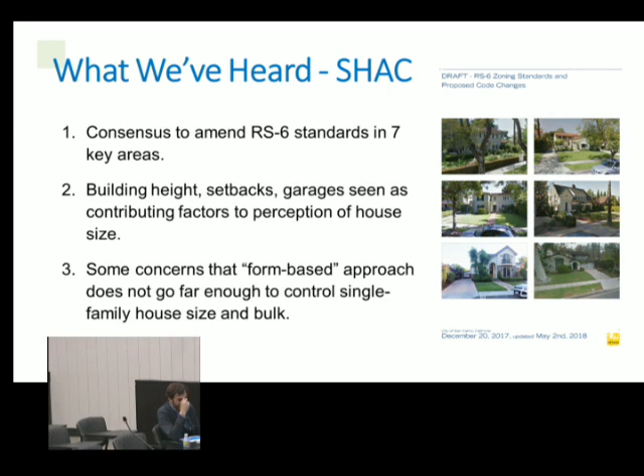For the next slide, I'm going to back up a little bit and start with what we heard from the Single Family House Advisory Committee. When we started out, the charge from the City Council was to look at the size, scale, and massing of single-family homes, in reaction to some community members talking about how houses had gotten larger and the scale and massing of our homes in the community.

The City Council put together the Single Family House Advisory Committee, and they looked at the standards we currently have. When they looked at our current standards and what was being built, they noted key areas that they believed, if adjusted, would reduce the mass and scale of homes in the community. These were things such as building height, setbacks, and where you put the garage.

A lot of times the concern we were receiving is from homes that had a 2-car garage at the front of the house. On smaller lots, 40 and 50 foot wide lots, what we were seeing is that the garage dominated the ground floor, and the front door became an afterthought.

Some of the concerns they had, and others have had, is that maybe the form-based approach they were looking at doesn't go far enough in terms of dialing down the size and bulk of single-family homes. But they did talk about FAR a great deal.

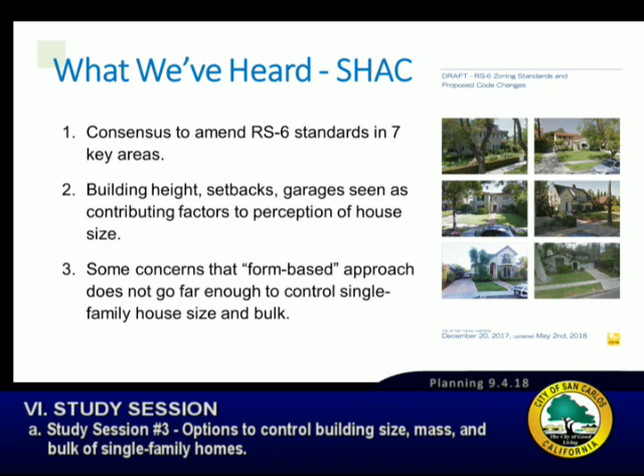The SHAC believed that the most effective way, by consensus, to reduce bulk and mass of the homes was to work on the physical characteristics of the house itself, to take the scale, the walls, and the roof and push it all in, as opposed to using a number to do that.

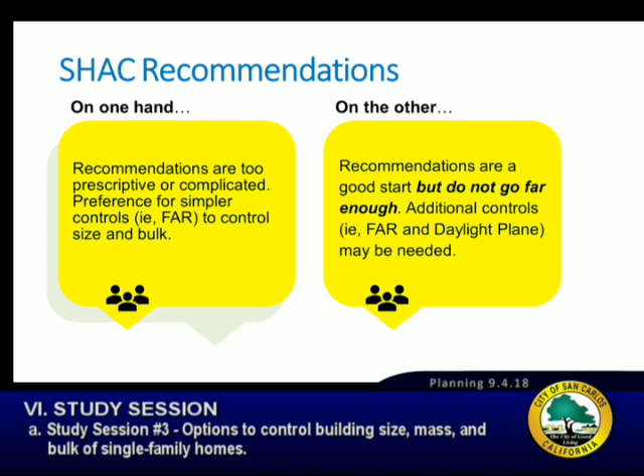So on one hand, what we've heard is some of these recommendations are too prescriptive, too complicated, and there's some preference for more simple controls like floor area ratio. On the other hand, some people think the SHAC came up with some pretty good ideas. However, they may not go far enough, and additional controls - we've heard of floor area ratio, and also people mentioning daylight plane - those things might be needed as well.

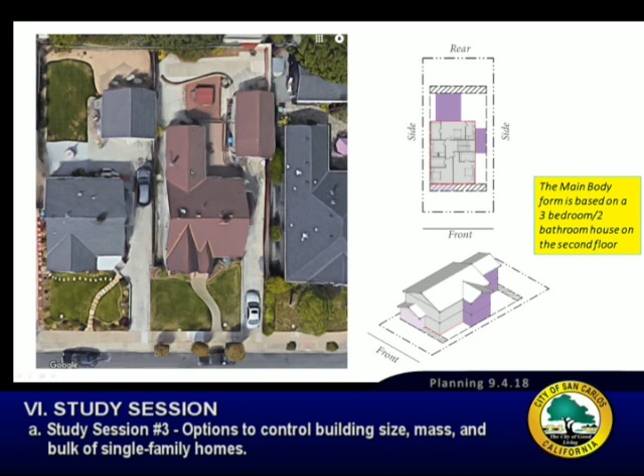What we've heard from the public is a desire for floor area ratio limits, and we'll talk about what that means, as well as a desire for something called the daylight plane. Since we began the process, other ideas and concerns have been discussed, like privacy, light, air, and views. Some believe the idea of a daylight plane might help with that.

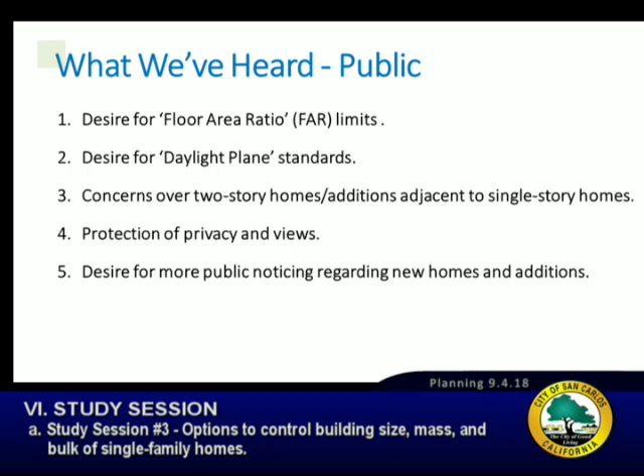There are concerns over two-story homes in well-established neighborhoods with single-story homes, and how that looks. There's also concern about protection of privacy and views, and a need for more public noticing for the Residential Design Review Committee meetings.

When we looked at these other communities, we looked at their codes and talked to the city planners to verify this information. There may be other ways to interpret these numbers, but we didn't want to be too drastic in our recommendations for FAR, and we did include our own city, San Carlos, in these calculations and comparisons.

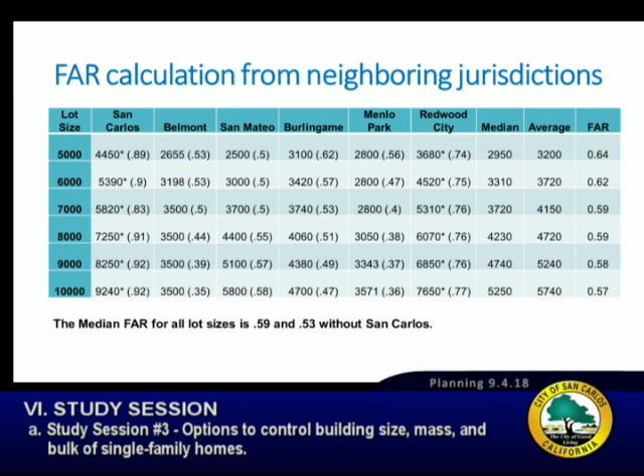Other interpretations of these numbers may include a lower FAR, but a different interpretation would not change staff's recommendation to you this evening for your sliding scale option, or option number 3, which is an FAR option. That wouldn't change. And if the Planning Commission wants a more restrictive or a less restrictive FAR, that's certainly up for your consideration.

One of the other things that came up at the Planning Commission is a concern about topography and how these standards would affect houses or properties with a steep slope in the hillside areas of our community. We've always recognized that these properties are inherently different—much more difficult to build on. They're very steep, and it costs a lot of money to dig out the hillside and put up big retaining walls.

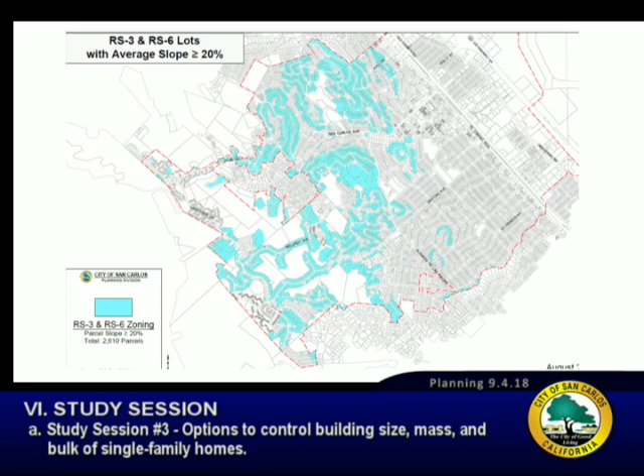We're not suggesting that the SHAC recommendations should be applied to these hillside areas—it's a different area. However, in order to reduce the bulk and mass on hillside homes, there are a couple of recommendations we would suggest adding to the hillside overlay district, which we'll talk about.

Then we looked at how many lots in our community are of a smaller size, and considered the idea of neighborhood zoning—where certain parts of our community with homogeneous characteristics might get specific standards for neighborhoods.

So if we were to divide our community into neighborhoods, it would be very complicated to do and difficult to implement and work with on a daily basis. Thus, our recommendation is to move forward with a property-based approach—based on individual lot widths—rather than a neighborhood approach.

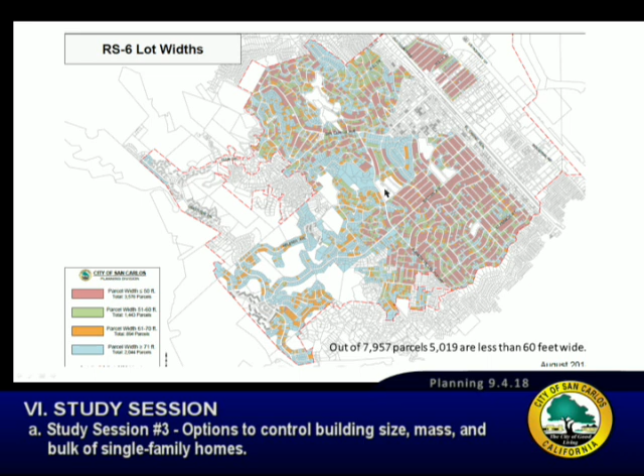Another concern was what happens up in the hills. Above Alameda de las Pulgas is where you start to get parcels in excess of 61 feet in width. So the larger parcels tend to be in areas with greater slopes—the hillside overlay zone. This gives us a good separation when dividing the community based on physical characteristics.

So in response to what we've heard from the commission and the community, we're presenting three different options. Option 1 would be the SHAC recommendation, including the architect's request, with one additional twist: an additional 9-foot second floor setback.

As you may recall with the SHAC approach, the main building mass could be two stories, and that two-story mass could move up to the side property line. It would have to be a condensed two stories, but still only 5 feet from the property line for a certain distance.

People thought, hey wait a minute, that's a little too much. So what we're suggesting is that the second floor be moved in 9 feet instead of 5 feet. That's different than what you've seen before—it's a more significant setback for the upper floor.

Option number 2 would be an FAR sliding scale. We'll go into detail, but basically the more square footage you want, the more rigorous a process you'd need to go through. Number 3 is a more simple, straightforward approach where you'd just have a floor area ratio and a lot coverage maximum, and work with what we've got today.

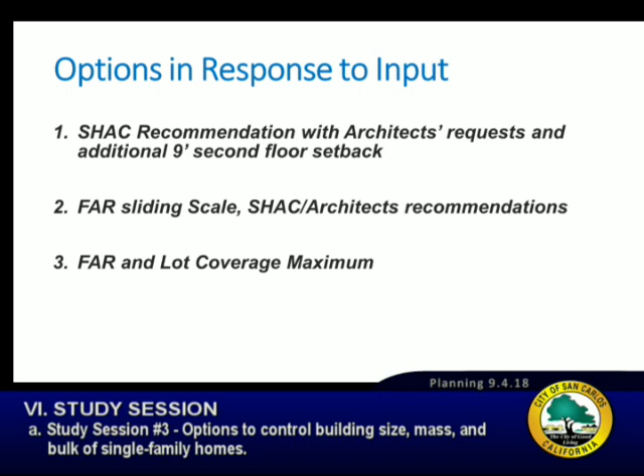In terms of option one, the SHAC recommendations, on the left-hand side you'll see the building setbacks—those are the controls they use. And the controls they suggested do have what we call resultant reductions. So based on today's standards, if you apply their standards, you would have a reduction in floor area ratio of about 20%, a 22% reduction in lot coverage, and an 18% reduction in overall square footage. So it does result in numerical changes to our homes.

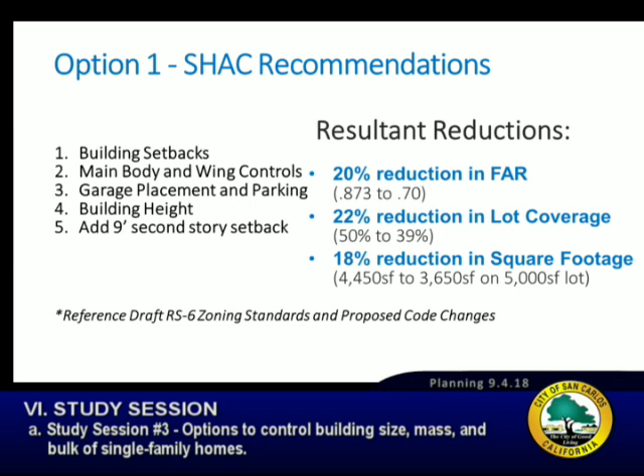In terms of sliding scale recommendations, I want to talk about some of the research that informed this suggestion. Looking back 10 years at almost 100 applications for homes, the majority are less than a 0.5 FAR and lot coverage less than 40%. However, I think what we've seen in the last 3-4 years is an uptick in the square footage of homes being built.

San Carlos currently has a maximum FAR of up to 0.92, and generally peninsula cities allow for a median closer to 0.59. We have a lot of lots, maybe 63%, that are less than 60 feet wide. In comparison to other communities—this was noted at SHAC and discussed in great detail—San Carlos is a little different in character than Burlingame, San Mateo, Menlo Park, which have more larger lots to contend with. As a point of reference, the current threshold for Residential Design Review Committee review of a new home is an FAR of 0.4.

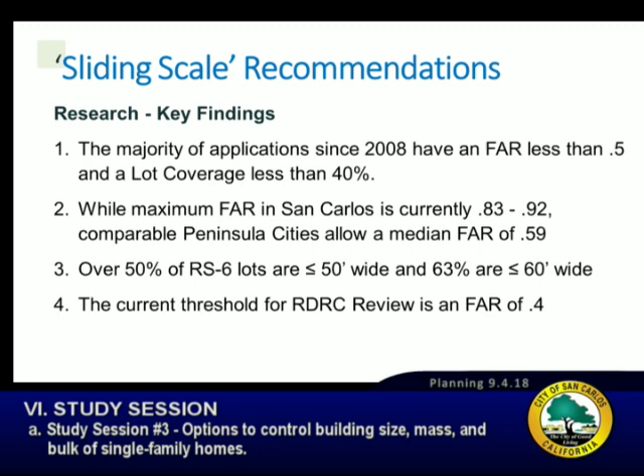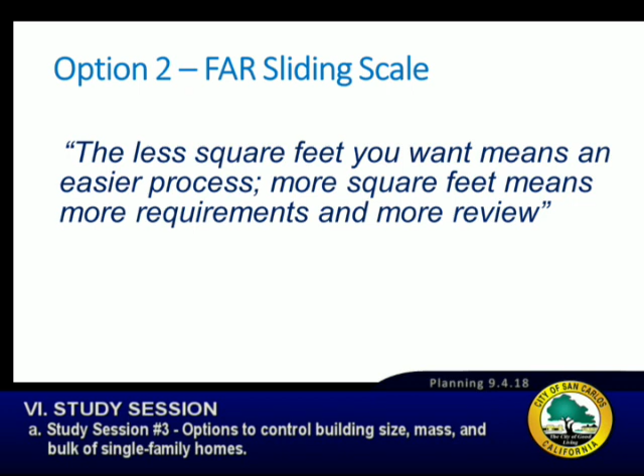Option two is the sliding scale, and the primary principle is that the less square footage you want, the easier process you go through. More square footage means more requirements as you ratchet it up, and more review. So let's look at that.

These are the three different sliding scale options, really based upon the house size you want. We started at a 0.50 FAR, and the reason we went to a 40% lot coverage is because of our historical average. If the commission thinks that should be larger or smaller, any of these numbers could be changed. But at 0.50, that would be processed by city staff using our current zoning standards. If you want more, 0.51 to 0.59, you'd have to go through residential design review, using the current standards. However, we would add some additional thresholds.

We would increase the rear yard setback and push that rear yard forward 20 feet on the first floor—currently it's 15—and 25 feet on the second floor. That really starts to open up the backyard. We'd also reduce the maximum garage width within 15 feet of the front facade to 40% of the facade on lots over 60 feet in width. Earlier I mentioned that garages became dominant and added to that feel of mass on the front of the house—so that's what this addresses.

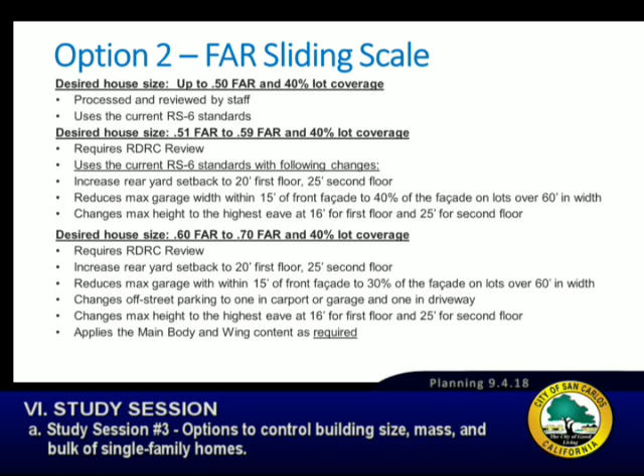And then changes to maximum height for the eave and second floor, to push down the upper floor and make it look lower. A desired house size of 0.6 to 0.7 requires RDRC review and some of these other standards we saw above, plus changes to off-street parking—1 space in the carport or garage and 1 in the driveway. You also have to apply the main body and wing content suggested by SHAC as a requirement, as opposed to a guideline.

Option 3 is very straightforward: let's retain what we have, but add a 0.5 maximum FAR for all lots, and establish a 40% maximum for lot coverage. We also talked about daylight plane, and a lot of people are interested in this concept of daylight plane.

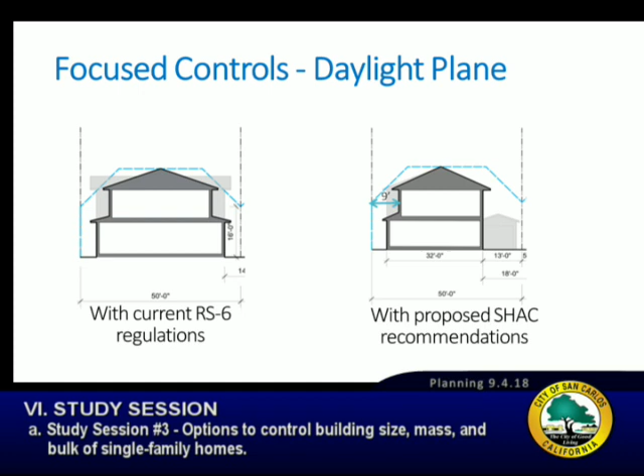What we see on the left-hand side of the screen is a daylight plane in our community without regulating it. The way we created our daylight plane is we set in that second floor 9 feet on both sides, and for the average daylight plane you see in most communities, it would fit within that. With the proposed SHAC recommendations and that additional 9 feet, this box area was the former SHAC recommendation, this gray area, and now we're suggesting if you did go that way, you would set that in and conform again to that daylight plane idea. We can talk more about these. This isn't recommended by staff, but it's something people have discussed.

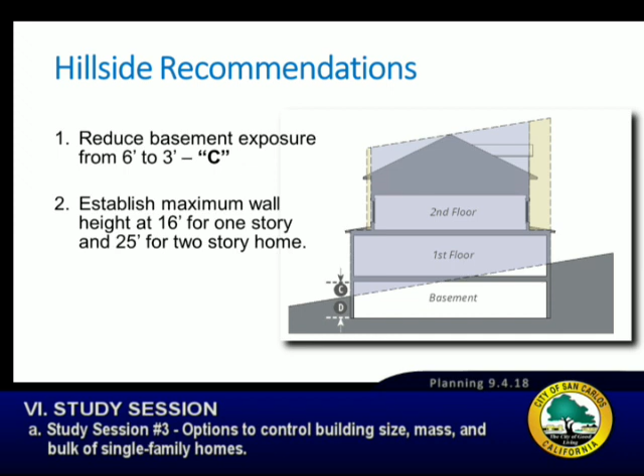In the hillside recommendations, we're suggesting a couple of changes. One thing we were seeing on the hillsides with these slopes is that people were putting in basements, and the part of the basement that you saw got real tall, generally about 6 feet. What we're suggesting is to dig it into the hillside a little more, lower it, so you'd see less of the home and it would look less like a 3-story house. We'd also establish a maximum wall height at 16 feet for 1 story and 25 feet for a 2-story home, which we didn't have before. Again, that compacts the roof form down a little to make the house look smaller.

So tonight we're asking for some direction. We'd like you to direct us to proceed with one of the options, or you could mix and match if you like. Once we get that direction, we would formulate a draft ordinance for your review at a public hearing. We're also looking for confirmation of some of the recommended changes to the hillside overlay recommendations. That concludes my presentation, and we're available to answer any questions.

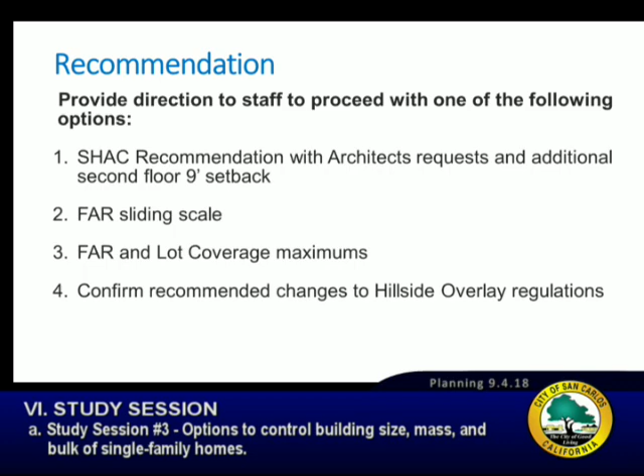Thank you. I have one comment, or would ask you to go into more detail on the daylight plane. We had one gentleman in here a couple of times who talked about his loss of sunlight, and my understanding from talking with the city is that it's because of how our zoning allows for less setback at the rear of the house. I would like that explained a little better, because I think that might play into the recommendations.

Well, what we're going to do is have Stefan look at that and talk about daylight plane. I guess the question is, are there going to be other questions we could gather up from the commission and have Stefan walk through some of the other technical issues like daylight plane? We can do it either way, but if there are going to be several, maybe we could have Stefan get up there and go through some of these. Well, as a complement to Shannon's comment, I'd like to understand the benefits of not having a daylight plane, or the impact of not having one, in terms of the design elements that would then be allowed.

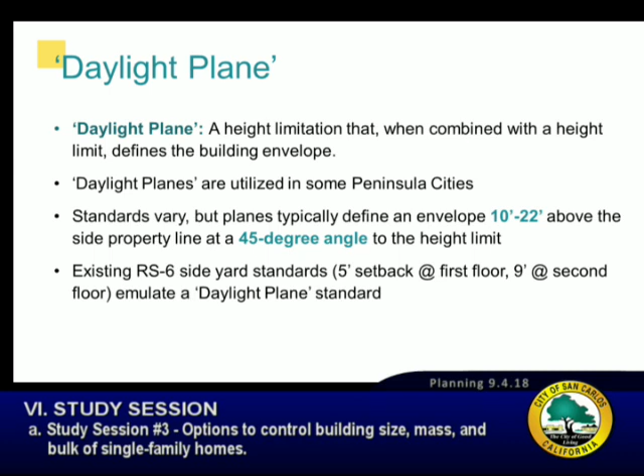As Al mentioned, what we have in San Carlos today in the existing standards is there's not a clear mention of a daylight plane, but the fact that the second floor has a 9-foot setback as opposed to a 5-foot setback imposed at the first floor, generally is causing the house to sort of fit into that trapezoid.

So when we analyzed what daylight plane standards were doing in other communities, we took a smattering based on some of the peer cities. Generally it's 45 degrees, generally between 10 and 22 feet measured at the side property line, and there are other factors which make it difficult to compare apples to apples. For example, Palo Alto imposes a very low daylight plane at the side property line, but they also allow additional height in the middle, greater than what other communities may do.

One of the things we've been concerned about is that the term daylight plane is a bit of a misnomer, in that the availability of sunlight in this three-dimensional slot that the daylight plane creates is very dependent on the orientation of your house. If your house and your neighbor's house were purely built on a north-south axis, the amount of sun that would enter into the daylight plane would be much greater than if your house was built on an east-west axis.

So the forms that the zoning promotes do not in and of themselves set a minimum amount of sun or light to reach the ground plane between you and your neighbor's house. So we want to be mindful of that.

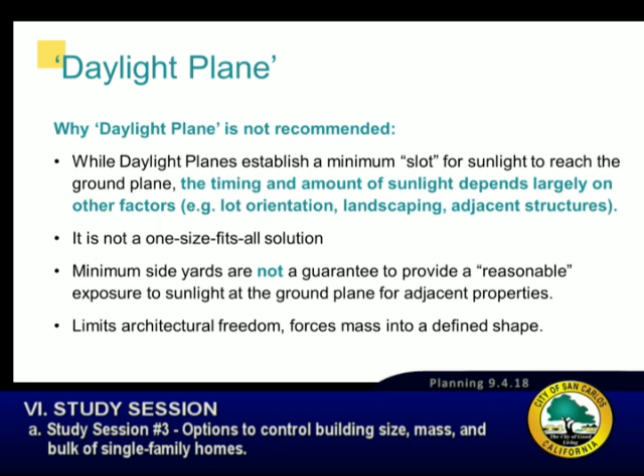You can do a two-story mass that is all the way to the 5-foot setback. The way the SHAC discussions went is that allotment would come out of how you actually dealt with the massing that would go into a wing. So if you had to set your main body back from the side, the two-story mass in the wing, which we had generally started to max out around 18 feet, would be allowed to go within that. That's the result you see in the massing of the houses and where they start to compete with the daylight plane.

So as today, what we typically get is a slot that is 10 feet wide between buildings on the first floor and 18 feet wide between buildings on the second floor. What this would actually generate is a larger setback, at least on one side of the property. But if you chose to put your house in the middle, the relationship of the two-story mass to your neighbor would more or less be the same as what you have today. But you can see that we are generally increasing the side yard setback compared to what the existing RS6 standards impose.

If the area which we are currently allowing to be a 5-foot setback in the rear, versus the 9-foot setback—if we were to make that a 9-foot setback as well and not allow the 5-foot setback in the rear for the extra 20 feet of the house, would that resolve any portion of the problems or complaints we are hearing, or would it not?

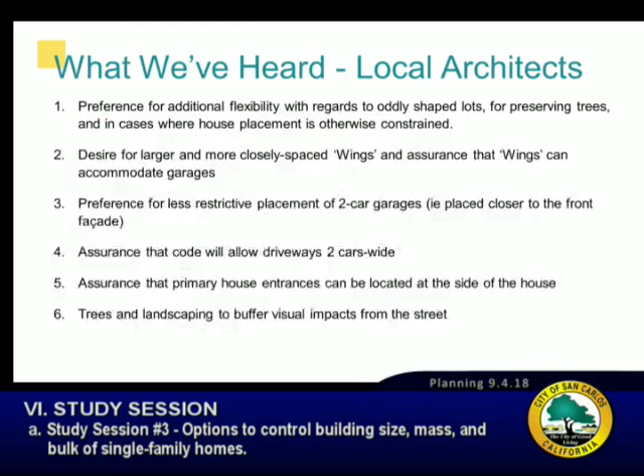Yeah, we do. Let's see if I can flip back to this, because that parlays back to your initial comment, Vice Chair Bergman, about the impact on rear yards. So I'm going to start with this one.

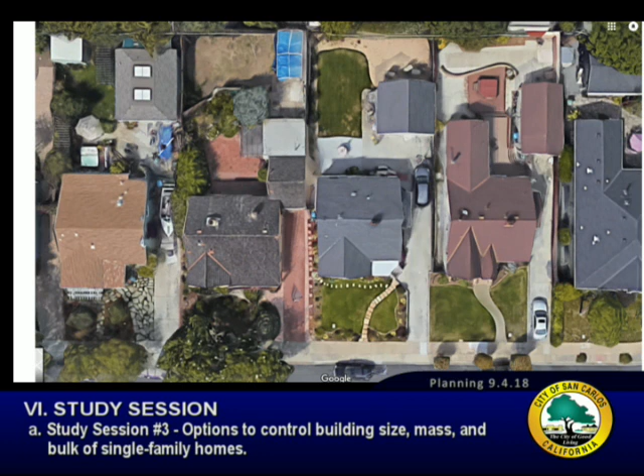Going back to this diagram that Al showed: not everywhere, but on many blocks, the size of rear yards is generally consistent, and it's generally much greater than that 15-foot minimum setback. It's fairly common for rear yards in San Carlos to be 25 to 30 feet in depth, but everybody is sitting on an untapped piece of their zoning envelope. That means if your neighbor chooses to build to the full extent of their rear setback within the limits of the control—today the 50% lot coverage—there is room for conflict, because suddenly where your rear yard was shared by adjacent rear yards and adjacent properties, you'll have a rear yard addition that is suddenly looking onto someone's backyard.

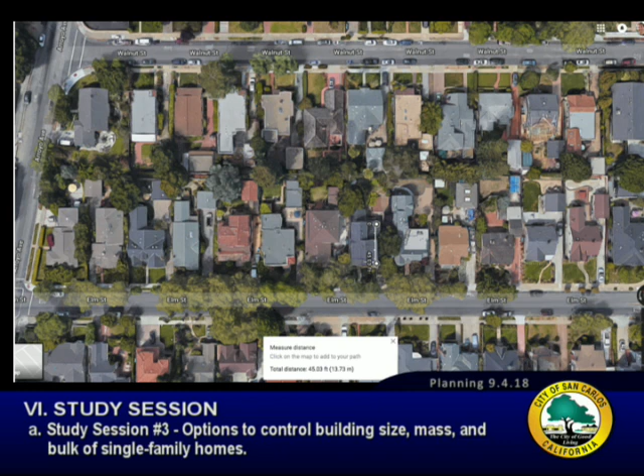So the idea behind increasing the minimum setback by at least 5 at the ground floor and by 10 on the second floor, and limiting the amount of addition space that can go into the area between the main body and the rear yard to the dimension of a rear wing, is to start to limit some of those potential conflicts that we see. So, I'm sorry, go ahead.

I was just going to say, but that's except with regard to the new garage standard, which can be right on a 5-foot setback. Trying to reconcile the thought that this is a much more liberal, airier setback for your neighbor, but then encouraging people to put a garage at a 5-foot setback seems very counter to that thought.

That is correct, and I appreciate that comment. One thing to keep in mind is that the provision to put the garage at the rear setback is not a new standard—it's actually built into the existing RS6 zoning. I don't know why that was done, but I suspect the insertion of a garage in that rear yard zone has a different impact on privacy than the insertion of an actual house.

There's another angle to that when we start to think about that garage as a place where you could put an accessory dwelling unit or something similar. And so those things actually do start to raise.

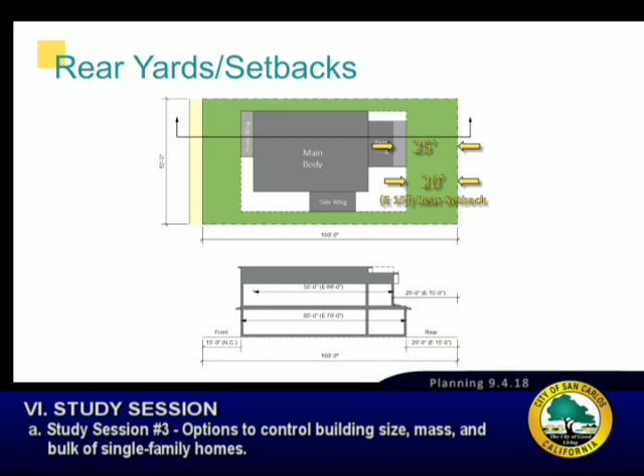One of the intentions of the SHAC recommendations was that it seemed to make sense to carry that provision forward, allowing the garage to go all the way back to essentially the rear of the property, particularly because it doesn't present the same privacy issues that building a house to the rear would suggest. Historically, in the massing of the house, one of the main problems we have is these big garages at the front. So one of the things SHAC looked at is, what if we took that out? What if we removed that box out?

What happens? Well, the house gets smaller. It's like a balloon, right? You take air out of the balloon. And we're already doing that—we're already putting our garages at the rear throughout the community, and people have been doing it for decades and living that way. So let's codify that, let's make some standards around that, maybe more robust standards. So that's the intent: to take that not-livable area and put it somewhere else, so the main body of the house looks smaller.

And Al, are we treating garages any differently, or do they count as lot coverage and floor area ratio space? They count as floor area ratio space. Now, I can't recall if they count as lot coverage too. They do? Yes, they do. Even when detached and on the rear line? Okay, yeah, okay.

So this slide is part of a larger discussion. We didn't have a chance to share these with you last time, but thinking about the rear yard setback, this is a strategy. Today you have 15 feet. There's a provision for detached garages today that can actually shift them back all the way to the rear property line. What we're proposing is 20 and 25 feet at the first and second floor respectively.

The analysis we show here is that today you can build a building up to 85 feet from the front property line back into the lot, and these standards would shift that from 85 to 65 feet. So the maximum depth of a building would be reduced, and that back portion would be limited to a rear wing, as opposed to the full extent of the zoning envelope moving to the back setback.

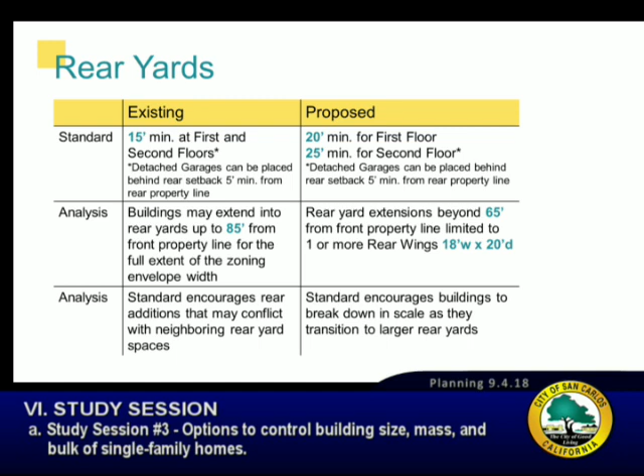But is there another way to get at the same issue? I personally have a hard time with taking away people's backyards. Can you get the same effect by making the setback 9 feet, period, on the sides of the house, instead of 9 feet except for the last 20 feet where it becomes 5 feet? Will you get the same result? Yeah. And plus the reduction of the lot coverage from 50 to 40%—would that solve the problem as well?

Yeah, I mean, there is a consideration. I think what I'm hearing you ask is, could the side yard setback be consistently applied at 9 feet? Would that make a difference on the daylight plane? Yes, it would. And I think our measurement is that, understanding the majority of lots are 60 feet or less in width, and over 50% of lots are actually 50 feet or less in width, that's a pretty significant reduction in buildable area if that setback is imposed on both sides.

So what we're suggesting is that you'd still be allowed to build up to a 5-foot side yard setback. The SHAC recommendation said you could, in theory, shift that all the way over to one side of the setback on the property. And then what Al has described tonight is that if there's a concern about the height and mass of that two-story form at the side setback, an additional 9-foot setback at the second floor could be imposed.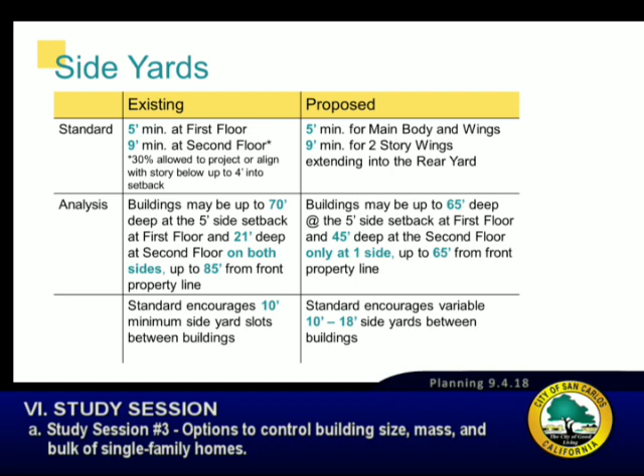And if I can flip back to this, I can show that graphically what we're talking about. Stefan, I was thinking maybe we should show some of the models. I think those are in your presentation. I can do that, because what you're saying might be easier to see.

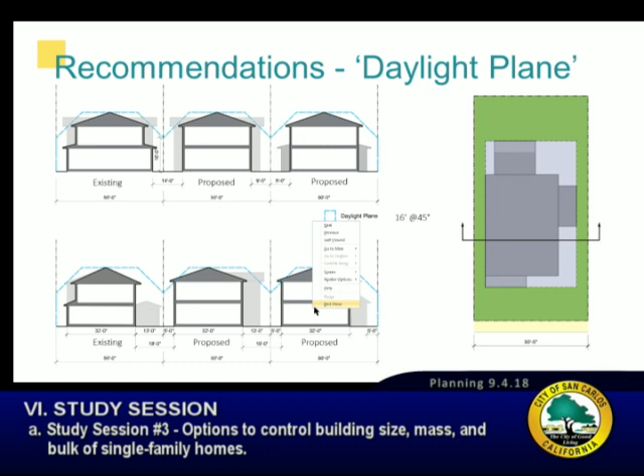Let me stop for a moment, because the way I'm looking at this is just my own personal feeling. I'm personally leaning towards having a FAR and a lot coverage standard. What I'm trying to get at by asking these questions is whether we can reduce the likelihood of affecting people's light plane, or whatever we'll call it now, by imposing new standards for FAR, lot coverage, and possibly setback. I don't know if that's the right answer, and I'd like the architects to weigh in on that, but that's where I'm going. I want to let you continue.

If I can quickly respond to that, the setback standards as proposed do emulate a daylight plane as it has historically been applied in San Carlos. So it would not positively impact the light. It would still cause light problems if it's imposed today the way it is.

I'm sorry, I'm getting all confused. Wouldn't change anything. It wouldn't change anything. We'd still have this issue.

Well, I will say, is that true if you do the 9-foot second story setback? Because I want to, Al, excuse me, but if we could go back to the side setback analysis and stick with that, because I think what Vice Chair Bergman is actually referring to, we were talking about the rear yard, but you're referring back to the side yard now.

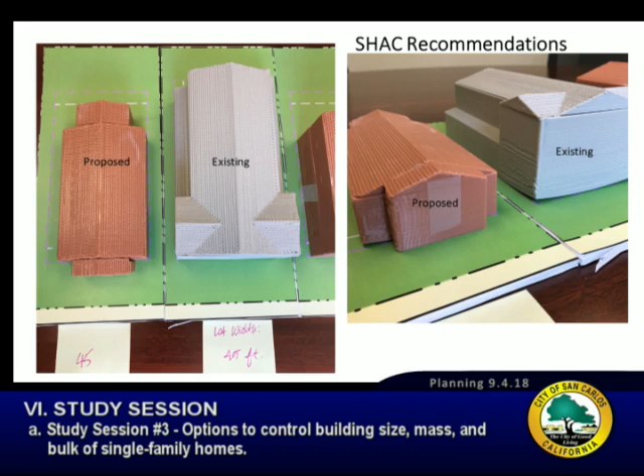Our analysis suggests, as Al mentioned earlier, that the SHAC recommendations in and of themselves result in a reduction in maximum house size of about 20%. Generally, when we look at all the conditions and average them out, we're looking at houses about 20% smaller, dropping the FAR to around 0.7, though it does get a little bigger. What we'd see is that we're not restricting the ground floor floor plate to a point where a decision would be made to go up when folks otherwise aren't making that decision today. The exception is on the smallest lots, where the SHAC wanted us to look at ways to enable one-story houses to get larger on the first floor without going to a second floor.

One of the incentives discussed last time was to give those particular conditions a larger build-out of the ground floor so they wouldn't have to go up. Our analysis otherwise suggests that the second floor square footage doesn't substantially drop below the range of what's being proposed today until you start dialing that FAR number down further. The imposition of an additional FAR would be the situation where we'd start to see further reductions in the zoning envelope in order to have houses that met the standards. So you're saying that without an FAR, we'd probably see larger second floor development?

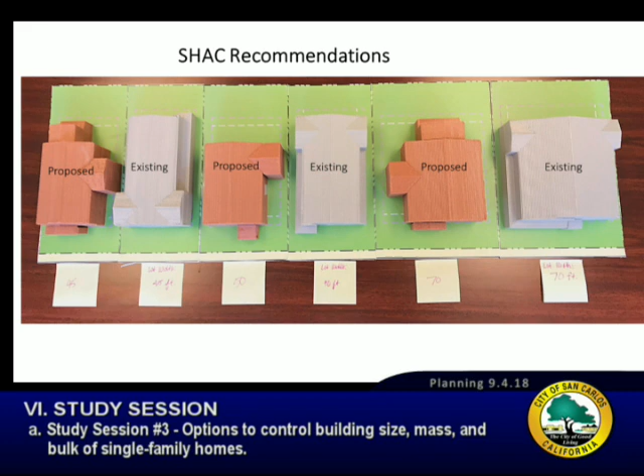So can you just keep on that thread and imagine a couple of the recommendations here being combined: the large FAR, let's use 0.59 as a placeholder, in addition to the SHAC recommendation, and also not constraining the lot coverage to squish all of that mass up, but allow it to spread out. Is that a compatible world? Can those things live together and come up with more incentive for one story, give creativity, and not encroach on your neighbors?

Yeah, I think two things to respond to that, and that's a very good question. If we think about the SHAC recommendations as generally a 20% reduction in house size, and if we added an FAR of 0.7 along with some other things the architects had recommended, we're looking at an additional 5% reduction, or about a 25% reduction from what's allowed today.

If we did that and imposed a median 0.59 FAR, it's about a 35% reduction in zoning envelope. The idea behind the third option that Al presented, the sliding scale idea, is that you would be procedurally incentivized to propose smaller houses. Part of that would be about a streamlined review process that could avoid the RDRC, but part of it would be avoiding additional standards that would force you into a more compact two-story envelope in order to get greater square footage.

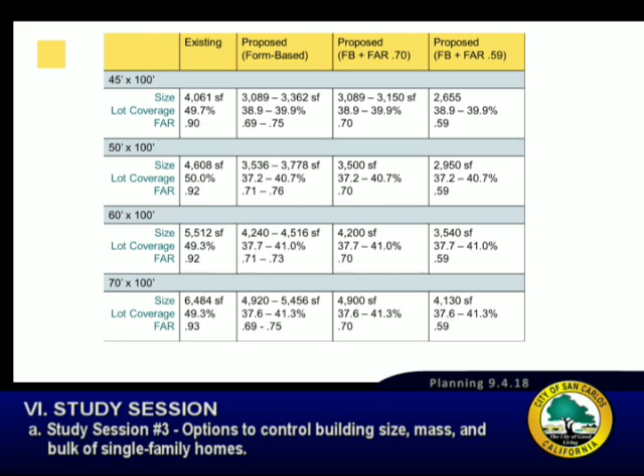The other thing I think to keep in mind is this - let's see if we can find this here. The other useful piece of data, this is a breakdown of the numbers that Al presented, based on almost 100 applications in the past 10 years in San Carlos.

The vast majority are actually coming in under an existing FAR of 0.5 and a lot coverage of less than 40%. And you can see that the 0.6 and 0.7 thresholds are about 23% and 7% respectively.

And this started to get us thinking about the idea that, well, as you do swing bigger, maybe you could continue to allow these, provided that there are more restrictions and a more restrictive review process. That is also something other cities have - they tend to have some sort of exception. They say, well, this is the largest house you can do, but here's an exception you can go through to actually get something larger than that.

So we believe that the 0.59 would allow the majority of proposals, as they have historically been proposed. It wouldn't create a cap that would limit the majority of those from actually occurring. But it would be less than the largest houses that actually have been proposed historically in the last 10 years.

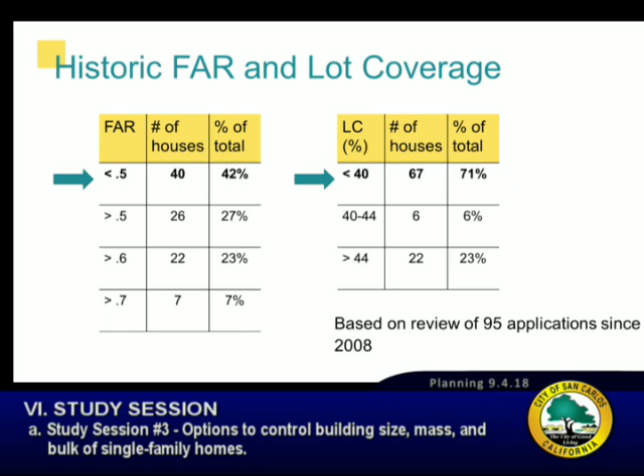Another significant area of concern that I haven't heard addressed in any of this is what's the thinking on how remodels will be treated under this new standard?

That's a very good question. Today, the short answer is that they would be treated much the way they are treated today. If parts of the existing building are in a non-conforming condition, those can remain as long as 50% of those walls are actually maintained. There are provisions today that allow existing buildings to expand, and if they retain things on their property that are not to current standard, as long as they don't change more than 50% of that, they're allowed to have those existing walls and spaces continue.

An example might be if a house has an existing side yard setback of 3 feet instead of 5, they can be allowed to not rebuild that whole wall unless they touch more than 50% of it. The thought is that if we imposed additional main body and wing standards, they would start to apply in much the same way. Or if you had a new garage setback standard, it would apply similarly. You could keep what you have unless you want to shift more than 50% of it, and then you would be required to bring that up into conformity. That follows the tradition of what we have today.

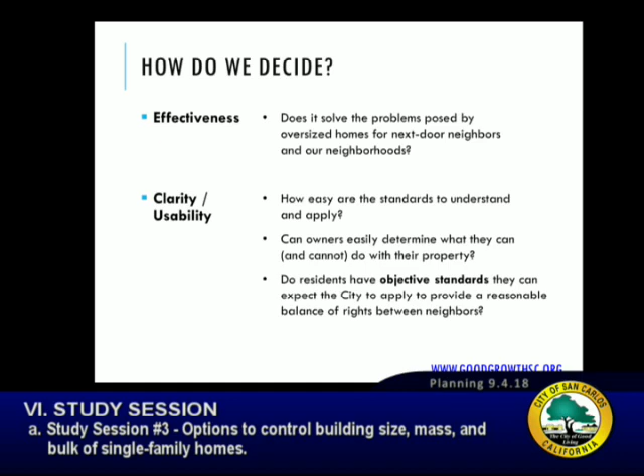And then lastly, we've heard a lot of the folks who have been before the RDRC in the past in terms of having objective standards, because the neighborhood compatibility guidelines that are set out today have left some ambiguity, whereas like Bill Harcola mentioned earlier, the RDRC said, we're sorry, but we just can't do anything to help you, right? So we do think objective standards as it relates to whatever is ultimately decided on is important in terms of providing the tools for the RDRC and for the planning staff to be able to utilize.

Christian, you want to talk a little bit about our analysis? So if we accept the notion that looking at whether or not the standards solve the problem, so that's the effectiveness, and secondly, are they really usable by professionals, by all stakeholders in the process, this is a really netted out view of pros and cons.

We just haven't had the time, both because the packet just came out Thursday night and we don't have, it's a holiday weekend and don't have a lot of time to analyze, and secondly, we're asked to take 2 minutes to comment on something which clearly is complex, and we've heard from the city for the past hour and a half on this.

So long story short, if you look at the current SHAC, it allows FARs actually up to 75%. So do we think that solves the problem? No, of house size and the impact on neighbors. Usability, they're complex to understand, and a lot of people have raised those issues.

The sliding scale also allows very large homes up to 70%, which again we feel is way out of line with our estimation of the median FAR in comparable cities, which is 47 to 56%. So well above it. And it's complex. We've got 3 levels, and you're asking us to rely on a review process that historically has not had teeth.

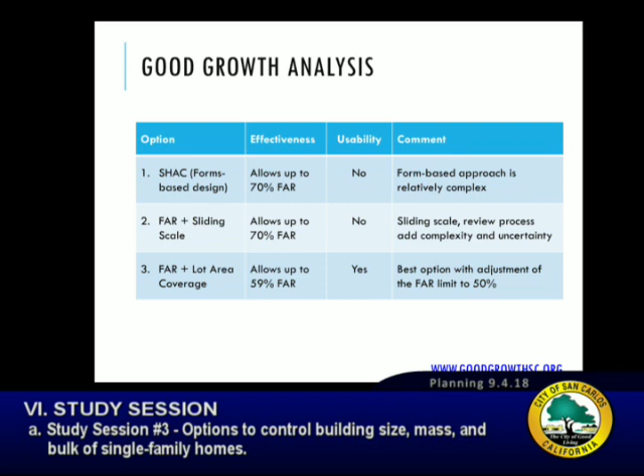I take real issue with many of the numbers the city has put up. I feel like they're misleading. In this case, if you calculate the median FAR and exclude San Carlos from the data, we know San Carlos has a FAR about twice as large as most other cities on the peninsula. If you exclude San Carlos, the median you get is 47 to 56%. You only get up to 53 and 59% as a median if you include San Carlos, and including San Carlos in a data set against which you're comparing San Carlos makes no sense whatsoever. The median, average, and FAR numbers up there all also include San Carlos. So to me this feels like misleading with statistics.

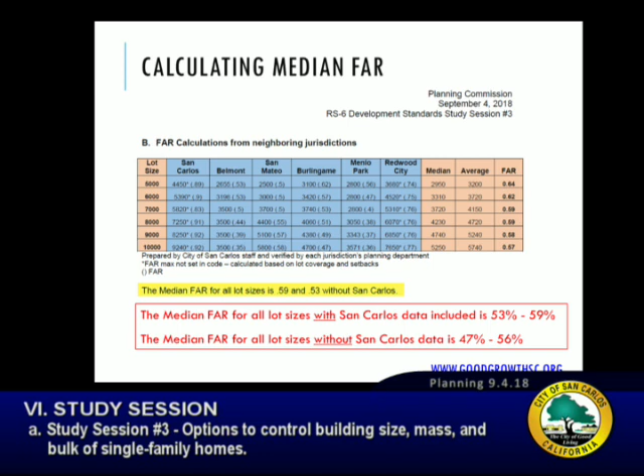To sanity check what a 70 to 78, or even a 60% FAR looks like, this is a house that is one of the key players in triggering this whole initiative, why people got up in arms about large homes in San Carlos. On the left is what used to be there, on the right is what is there now. 3,356 square feet on a 5,400 square foot lot. This was in my neighborhood, and it was 2.9 times as dense as every other home in the neighborhood in terms of FAR ratio. It had minimum setbacks on all sides, and what you're looking at there is 62% FAR. So a 59% FAR, I think, is not solving the problem.

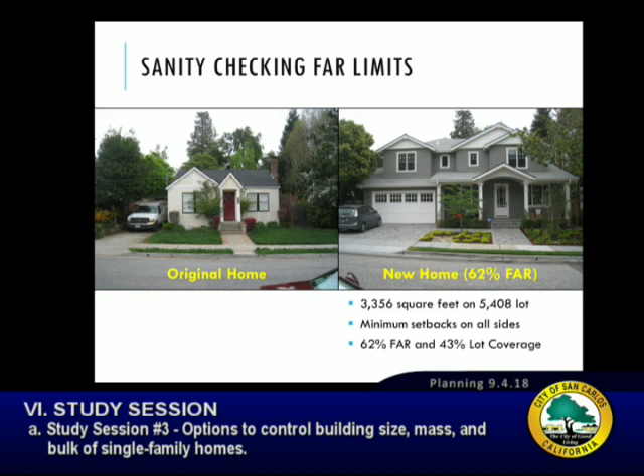So we think we're supporting a simple approach, 50-50. We think FAR and lot area coverage, potentially with daylight plane too, are the two essential elements. If there were a 50% limit on the FAR, why not maintain lot area coverage at 50%? It gives people the flexibility to build what they want on the ground floor, and we know 2-story homes are the major issue. It also has the least impact on neighbors and is less expensive to build. I think that's the main thing.

I guess I want to close with, I continue to chafe a little bit in my seat as I hear 'SHAC recommended this, SHAC recommended that.' I'd like to advise people, it was a single family home advisory committee. We made no decisions. We were presented with the form-based option as pretty much the only option to consider, and asked to say whether we liked the elements that went into it. It wasn't as if we began and said, what are the different ways we can solve these problems, we could use FAR, form-based, or something else. So if this is the SHAC's recommendation, where is the SHAC in this process? I'm the only member of this body that's been showing up at these meetings. So if it's their recommendations, why aren't they here explaining them?

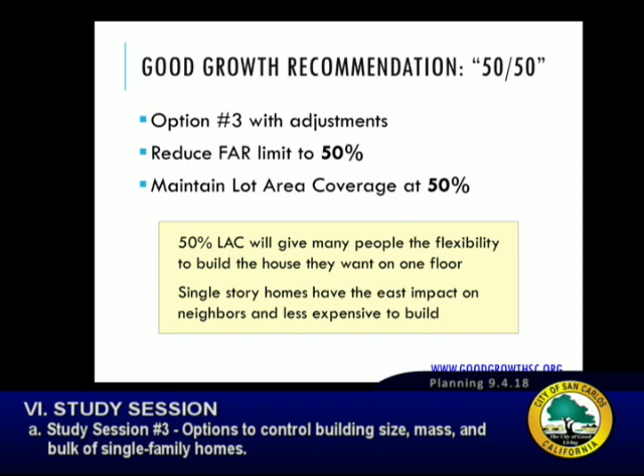It's kind of like saying we've doubled your taxes one year, and then you come back later and say, oh, we've reduced your 200% taxes by a third. Isn't that nice? It's meaningless.

So I just think God bless the architects that are coming here and speaking up, because it's not just residents, and I think they give some credence to what residents have been saying for 2 years now. And I really think it's time for the city and the planning staff to listen to the residents and get in line. And we're getting closer.